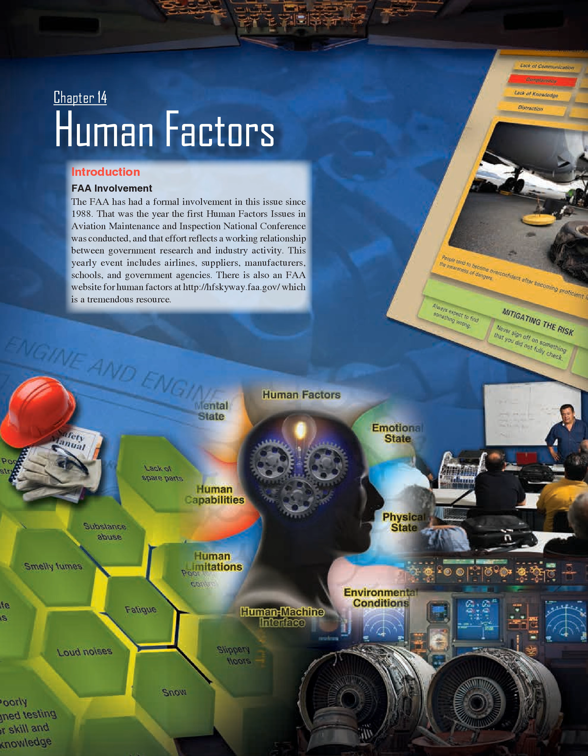There is also an FAA website for human factors at http://hfskyway.faa.gov/ which is a tremendous resource.

Importance of human factors. The greatest impact in aircraft safety in the future will not come from improving the technology. Rather, it will be from educating the employee to recognize and prevent human error. A review of accident-related data indicates that approximately 75 to 80% of all aviation accidents are the result of human error. Of those accidents, about 12% are maintenance-related. Although pilot/co-pilot errors tend to have immediate and highly visible effects, maintenance errors tend to be more latent and less obvious. However, they can be just as lethal.

Definitions of human factors. Human factors are concerned with optimizing performance, including reducing error so that the highest level of safety is achieved and maintained. Ron Lo-Ferro, Ph.D., FAA. Human factors is the study of how people interact with their environments. FAA-H-8083-25 Pilot's Handbook of Aeronautical Knowledge, dated 2003. Human factors are those elements that affect our behavior and performance, especially those that may cause us to make errors.

Canadian Department of Defense video. Our focus is on human factors as it relates to improper actions. Note, however, that human factors exist in both proper and improper actions. Figure 14.1. Since improper actions usually result in human error, we should also define that term. Human error is the unintentional act of performing a task incorrectly that can potentially degrade the system.

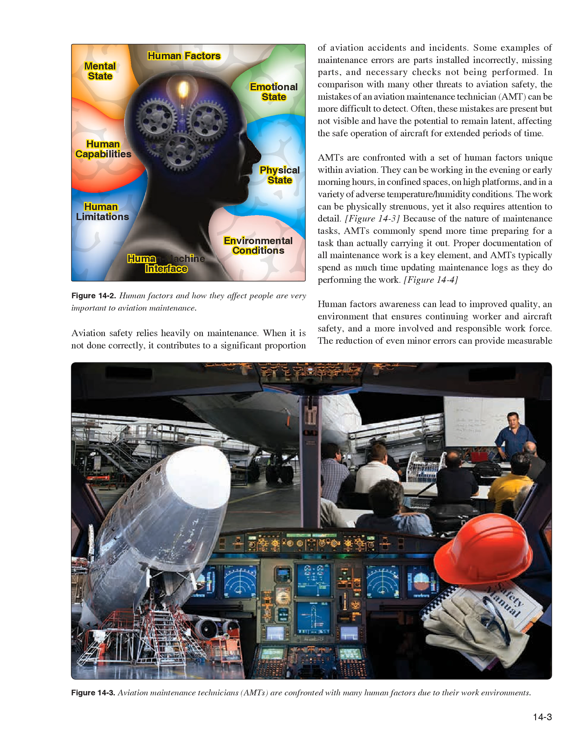The reduction of even minor errors can provide measurable benefits, including cost reductions, fewer missed deadlines, reduction in work-related injuries, reduction of warranty claims, and reduction in more significant events that can be traced back to maintenance error.

Within this chapter, the many aspects of human factors are discussed in relation to aviation maintenance. The most common human factors are introduced along with ways to mitigate the risk to stop them from developing into a problem. Several Federal Aviation Administration, FAA, human factor resources are provided, including a direct link to aviation maintenance. Human factors are at https://hfskyway.faa.gov.

What are human factors? The term human factors has grown increasingly popular as the commercial aviation industry realizes that human error, rather than mechanical failure, underlies most aviation accidents and incidents. Human factors science or technologies are multidisciplinary fields incorporating contributions from psychology, engineering, industrial design, statistics, operations research, and anthropometry. It is a term that covers the science of understanding the properties of human capability, the application of this understanding to the design, development, and deployment of systems and services, and the art of ensuring successful application of human factor principles into the maintenance working environment.

The spectrum of human factors that can affect aviation maintenance and work performance is broad. They encompass a wide range of challenges that influence people very differently, as humans do not all have the same capabilities, strengths, weaknesses, or limitations.

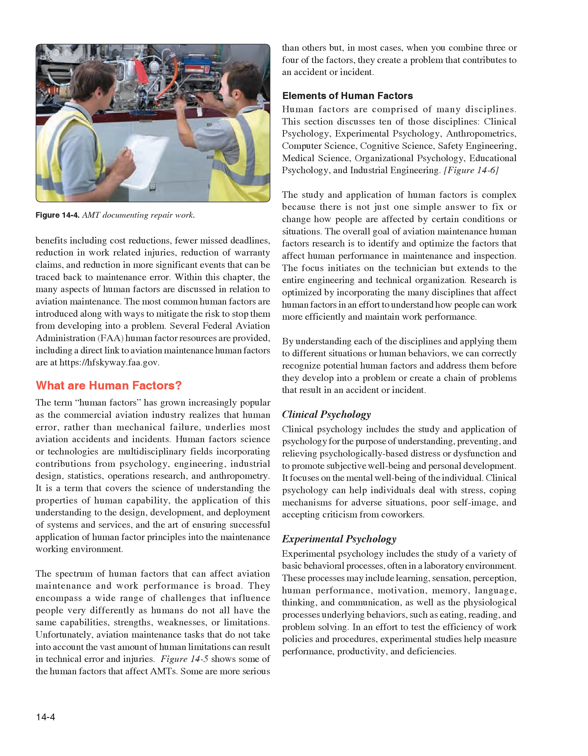Anthropometry. Anthropometry is the study of the dimensions and abilities of the human body. This is essential to aviation maintenance due to the environment and spaces that AMTs have to work with. For example, a man who is 6 feet 3 inches and weighs 230 pounds may be required to fit into a small crawl space of an aircraft to conduct a repair. Another example is the size and weight of equipment and tools.

Men and women are generally on 2 different spectrums of height and weight. Although both are equally capable of completing the same task with a high level of proficiency, someone who is smaller may be able to perform more efficiently with tools and equipment tailored to his or her size. In other words, one size does not fit all, and the term average person does not apply when employing such a diverse group of people.

Computer science. The technical definition for computer science is the study of the theoretical foundations of information and computation, and of practical techniques for their implementation and application in computer systems. Yet how this relates to aviation maintenance is simpler to explain. As mentioned earlier, AMTs spend as much time documenting repairs as they do performing them. It is important that they have computer workstations that are comfortable and reliable. Software programs and computer-based test equipment should be easy to learn and use, and not intended only for those with high levels of computer literacy.

Cycle, creating an enormous amount of stress. The discipline of cognitive science helps us understand how to better assist AMTs during situations that create high levels of stress so that their mental process does not get interrupted and affect their ability to work.

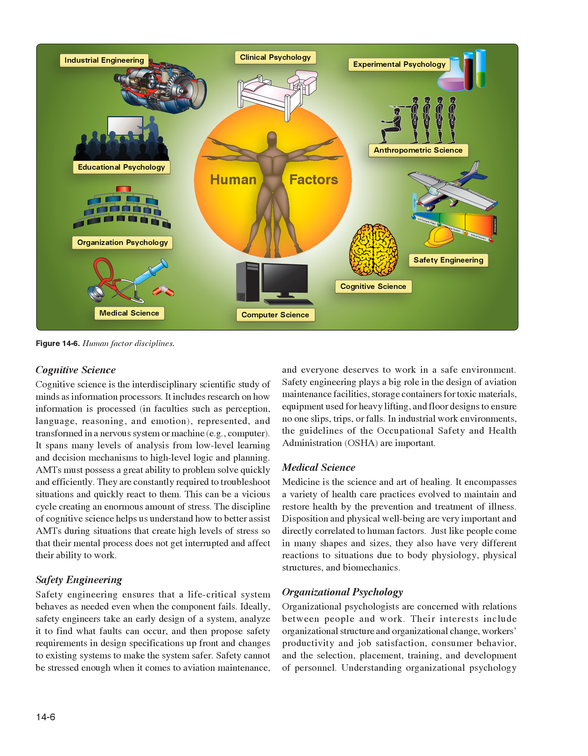Organizational psychologists are concerned with relations between people and work. Their interests include organizational structure and organizational change, workers' productivity and job satisfaction, consumer behavior, and the selection, placement, training, and development of personnel. Understanding organizational psychology helps aviation maintenance supervisors learn about the points listed below that, if exercised, can enhance the work environment and productivity.

Rewards and compensations for workers with good safety records. Motivation for workers to want to do well and work safely. Unifying work teams and groups so they get along and work together to get the job done right. Treating all workers equally.

Educational psychologists study how people learn and design the methods and materials used to educate people of all ages. Everyone learns differently and at a different pace. Supervisors should design blocks of instruction that relate to a wide variety of learning styles.

Industrial engineering is the organized approach to the study of work. It is important for supervisors to set reasonable work standards that can be met and exceeded. Unrealistic work standards create unnecessary stressors that cause mistakes. It is also beneficial to have an efficient facility layout so that there is room to work. Clean and uncluttered environments enhance work performance.

Another aspect of industrial engineering that helps in the understanding of human factors is the statistical analysis of work performance. Concrete data of work performance, whether good or bad, can show the contributing factors that may have been present when the work was done.

History of human factors. Around 1487, Leonardo da Vinci began research in the area of anthropometrics. The Vitruvian Man, one of his most famous drawings, can be described as one of the earliest sources presenting guidelines for anthropometry (Figure 14-7).

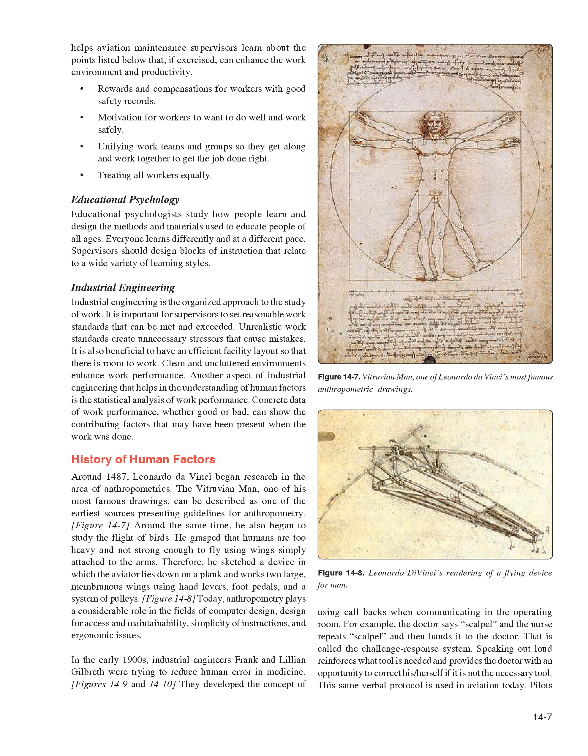This same verbal protocol is used in aviation today. Pilots are required to read back instructions or clearances given by air traffic control, ATC, to ensure that the pilot receives the correct instructions and gives ATC an opportunity to correct if the information is wrong. Frank and Lillian Gilbreth also are known for their research on fatigue.

Also in the early 1900s, Orville and Wilbur Wright were the first to fly a powered aircraft and also pioneered many human factors considerations. While others were trying to develop aircraft with a high degree of aerodynamic stability, the Wrights intentionally designed unstable aircraft with cerebralized control modeled after the flight of birds. Between 1901 and 1903, the brothers worked with large gliders at Kill Devil Hills, near Kitty Hawk, North Carolina, to develop the first practical human interactive controls for aircraft pitch, roll, and yaw.

On December 17, 1903, they made four controlled powered flights over the dunes at Kitty Hawk with their Wright Flyer (Figure 14-11). They later developed practical in-flight control of engine power, plus an angle of attack sensor and stick pusher that reduced pilot workload. The brothers' flight demonstrations in the United States and Europe during 1908 to 1909 awakened the world to the new age of controlled flight.

Orville was the first aviator to use a seatbelt and also introduced a rudder boost/trim control that gave the pilot greater control authority. The Wrights' flight training school in Dayton, Ohio included a flight simulator of their own design. The Wrights patented their practical airplane and flight control concepts, many of which are still in use today.

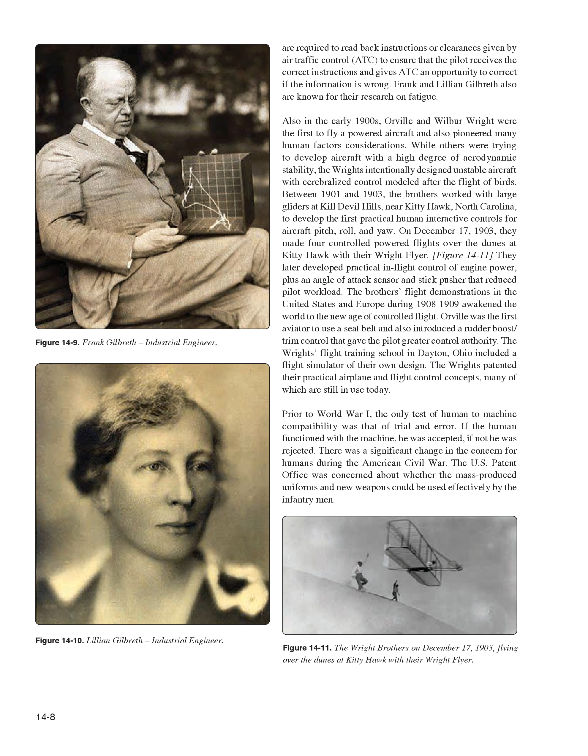Prior to World War I, the only test of human-to-machine compatibility was that of trial and error. If the human functioned with the machine, he was accepted; if not, he was rejected. There was a significant change in the concern for humans during the American Civil War. The U.S. Patent Office was concerned about whether the mass-produced uniforms and new weapons could be used effectively by the infantrymen. Evolution of maintenance human factors.

With the onset of World War I, 1914 to 1918, more sophisticated equipment was being developed, and the inability of personnel to use such systems led to an increased interest in human capability. Up to this point, the focus of aviation psychology was on the pilot, but as time progressed, the focus shifted onto the aircraft. Of particular concern was the design of the controls and displays, the effects of altitude, and environmental factors on the pilot.

The war also brought on the need for aeromedical research and the need for testing and measurement methods. By the end of World War I, 2 aeronautical labs were established, one at Brooks Air Force Base, Texas, and the other at Wright Field outside of Dayton, Ohio. Another significant development was in the civilian sector, where the effects of illumination on worker productivity were examined. This led to the identification of the Hawthorne effect, which suggested that motivational factors could significantly influence human performance.

With the onset of World War II, 1939 to 1945, it was becoming increasingly harder to match individuals to pre-existing jobs. Now the design of equipment had to take into account human limitations and take advantage of human capabilities. This change took time, as there was a lot of research still to be done to determine the human capabilities and limitations. An example of this is the 1947 study done by Fitts and Jones on the most effective configuration of control knobs to be used in aircraft flight decks.

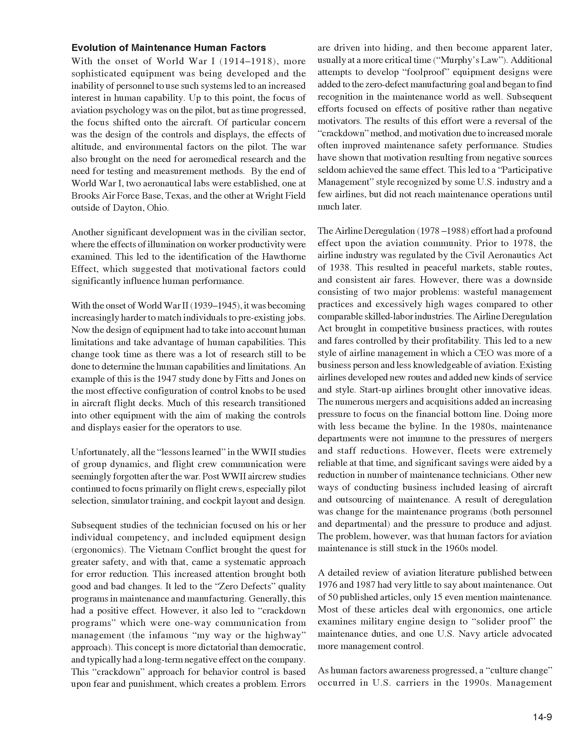As human factors awareness progressed, a culture change occurred in U.S. carriers in the 1990s. Management behavior began to change, there were practical applications of systems thinking, organization structure was revised, and new strategy, policy, and values emerged. Virtually all of these involved communication and collaboration.

One example is in 1991, when Continental Airlines began CRM-type training in maintenance. They saw the importance of improving communication, teamwork, and participative decision-making. A second example is when United Airlines instituted a change in organization and the job design of inspectors. They remained more accessible during heavy maintenance and overhaul and stayed in closer communication with mechanics during normal repairs. This resulted in fewer turnbacks and higher quality.

A third example is when Southwest Airlines created and sustained a strong and clear organizational structure led by the CEO. This resulted in open and positive communication between the maintenance and other departments. A final example is when TWA instituted a new program to improve communication between the maintenance trade union and maintenance management. This resulted in improved quality.

The PEAR model. There are many concepts related to the science and practice of human factors. However, from a practical standpoint, it is most helpful to have a unified view, or a model of the things we should be concerned about when considering aviation maintenance human factors. For more than a decade, the term PEAR has been used as a memory jogger, or mnemonic, to characterize human factors in aviation maintenance. The PEAR model prompts recall of the 4 important considerations for human factors programs, which are listed below. People who do the job. Environment in which they work. Actions they perform. Resources necessary to complete the job.

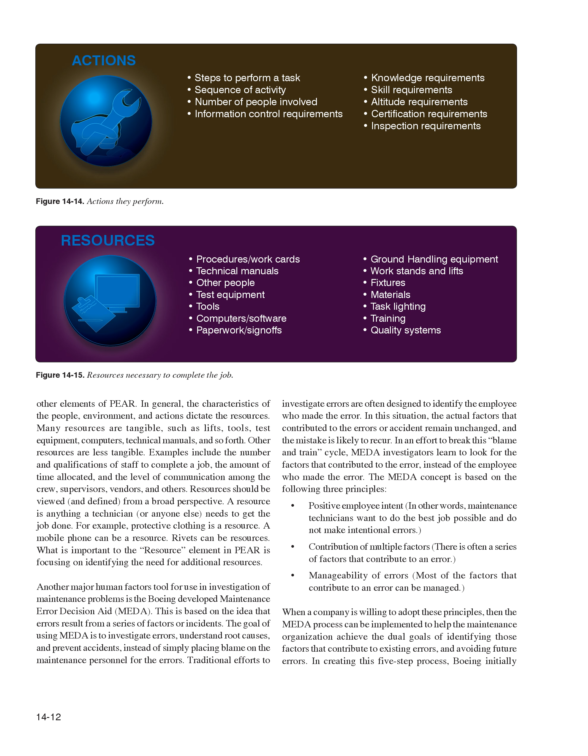In creating this 5-step process, Boeing initially worked with British Airways, Continental Airlines, United Airlines, a maintenance worker labor union, and the FAA. The 5 steps are: 1. Event. The maintenance organization must select which error-caused events will be investigated. 2. Decision. Was the event maintenance related? If the answer is yes, then the MEDA investigation continues. 3. Investigation. Using the MEDA results form, the operator conducts an investigation to record general information about the airplane, when the maintenance and the event occurred, what event initiated the investigation, the error that caused the event, the factors contributing to the error, and a list of possible prevention strategies.

4. Prevention strategies. The operator reviews, prioritizes, implements, and then tracks the process improvements, prevention strategies, in order to avoid or reduce the likelihood of similar errors in the future. 5. Feedback. The operator provides feedback to the maintenance workplace so technicians know that changes have been made to the maintenance system as a result of this MEDA process. The implementation and continuous use of MEDA is a long-term commitment and not a quick fix.

However, airline operators and maintenance facilities frequently decide to use the MEDA approach to investigate serious, high-visibility events which have caused significant cost to the company. The desire to do this is based upon the potential payback of such an investigation. This may ultimately be counterproductive because a highly visible event may not really be the best opportunity to investigate errors. Those involved in the process may be intimidated by the attention coming from upper management and various regulatory authorities.

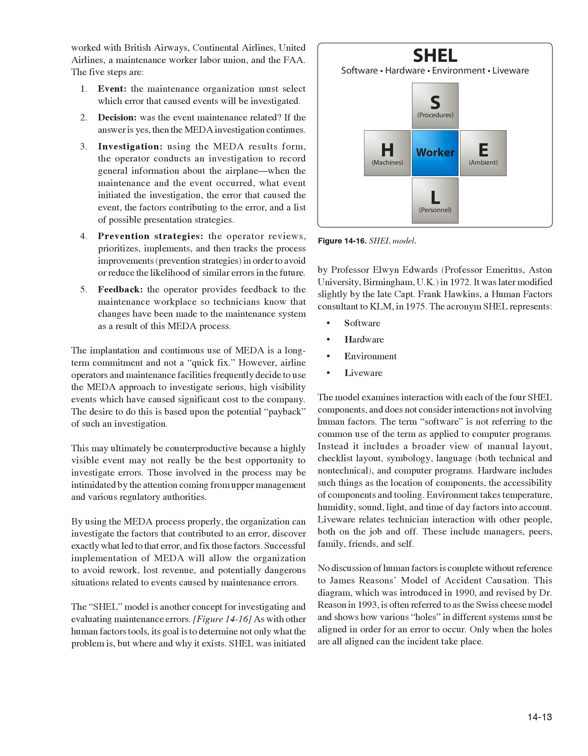No discussion of human factors is complete without reference to James Reason's model of accident causation. This diagram, which was introduced in 1990, and revised by Dr. Reason in 1993, is often referred to as the Swiss cheese model and shows how various holes in different systems must be aligned in order for an error to occur. Only when the holes are all aligned can the incident take place.

There are 2 types of failure which can occur: active and latent. An active failure is one in which the effects are immediate. An example of this type would be an aircraft slipping off one of the lifting jacks due to improper placement by the technician. In this example, the aircraft jack is the approved item of ground support equipment, and it has been properly maintained.

A latent failure occurs as a result of a decision or action made long before the incident or accident actually occurs. The consequences of such a decision may remain dormant for a long time. An example of a latent failure could also involve the aircraft slipping off a jack, but in this case, it could be an unapproved jack being used because funding had not been approved to purchase the correct ground support equipment (GSE).

The field of human factors, especially in aviation maintenance, is a growing field of study. This section of this chapter has presented only a small segment of the numerous observations and presentations about the topic. If the technician desires to learn more, numerous books exist and a review of internet data will provide an abundant supply of information. A good place to start researching would be the FAA's own website at

http://hfskyway.faa.gov/. This site, titled Human Factors in Aviation Maintenance and Inspection (HFAMI), provides access to products of the Federal Aviation Administration Flight Standards Service Human Factors in Aviation Maintenance and Inspection Program. Many aviation maintenance industry trade magazines include a section or at least a page devoted to human factors. The Human Factors and Ergonomics Society is a national organization composed of 22 technical groups, including one devoted to aerospace systems, which address both civilian and military issues of safety and performance.

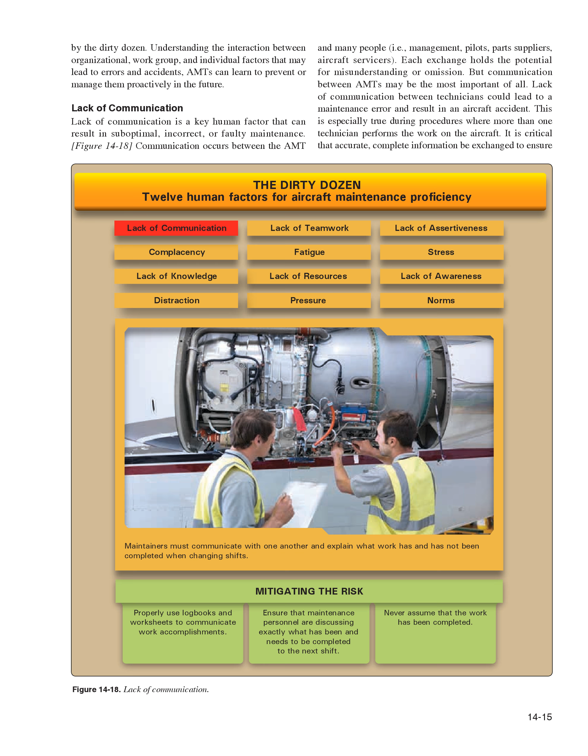Lack of communication between technicians could lead to a maintenance error and result in an aircraft accident. This is especially true during procedures where more than one technician performs the work on the aircraft. It is critical that accurate, complete information be exchanged to ensure that all work is completed without any step being omitted. Knowledge and speculation about a task must be clarified and not confused. Each step of the maintenance procedure must be performed according to approved instructions, as though only a single technician did the work.

A common scenario where communication is critical and a lack thereof can cause problems is during shift change in an airline or fixed base operator (FBO) operation. A partially completed job is transferred from the technician finishing his or her workday to the technician coming on duty. Many steps in a maintenance procedure are not able to be seen or verified once completed due to the installation of components hiding the work.

No steps in the procedure can be omitted, and some steps still to be performed may be contingent on the work already completed. The departing technician must thoroughly explain what has occurred so that the arriving technician can correctly complete the job. A recounting of critical steps and any difficulties encountered gives insight. A lack of communication at this juncture could result in the work being continued without certain required operations having been performed. The approved steps of a maintenance procedure must be signed off by the technician doing the work as it is performed.

Continuing a job that has been started by someone else should only occur after a face-to-face meeting of technicians. The applicable paperwork should be reviewed, the completed work discussed, and attention drawn to the next step. Absence of either a written or oral turnover serves as warning that an error could occur. It is vital that work not be continued on a project without both oral and written communication between the technician who started the job and the technician continuing it.